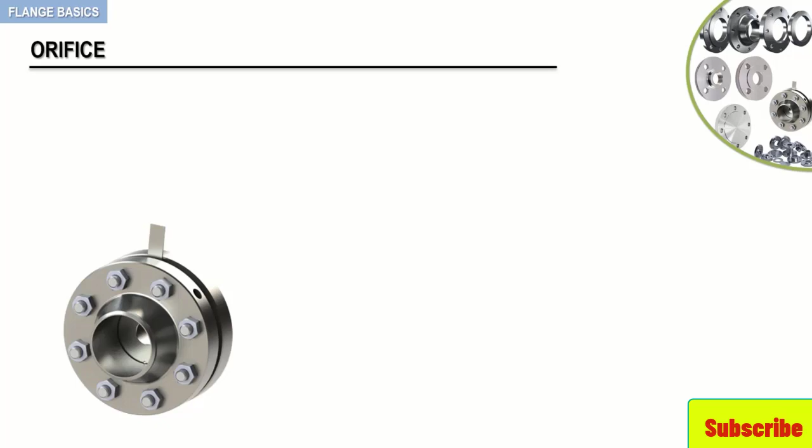In this video, we're going to talk about a particular flange, the orifice flange, so let's have a closer look. Why is it that the orifice flange is particular? Well, because of all the flanges discussed so far, the orifice flange, as in this example, is the only one that actually performs a function. The function of the orifice flange is to measure the flow rate of the fluid through the piping system.

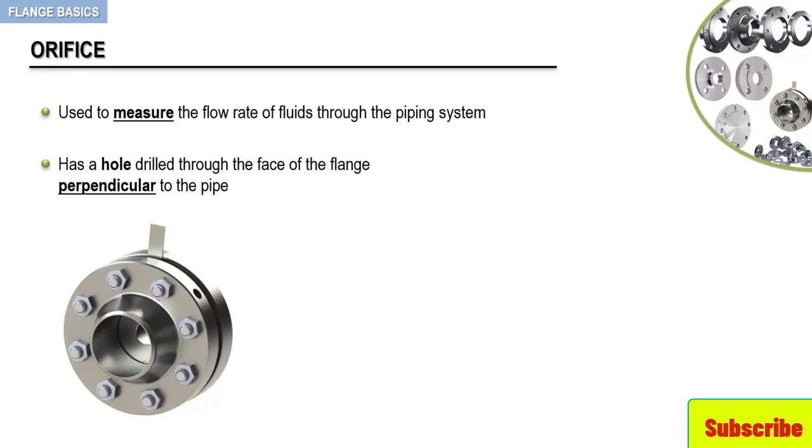Orifice flanges are easy to recognize because they have a hole drilled through the face of the flange, perpendicular to the pipe. To better illustrate this concept, let's have a look at an exploded view of a typical orifice flange. So here you have the flanges and the orifice plate. As you can see here, the plate is drilled through the face.

This orifice creates a pressure drop when the fluid passes through it. The measurement of this pressure drop permits the calculation of the flow rate, since pressure drop and flow are related to each other. The measurement of the pressure drop is done using a differential pressure gauge connected to the orifice flange taps that you can see here - one tap upstream of the orifice and a second one downstream of the orifice.

The next video will provide more details on how these special types of flow meters work.

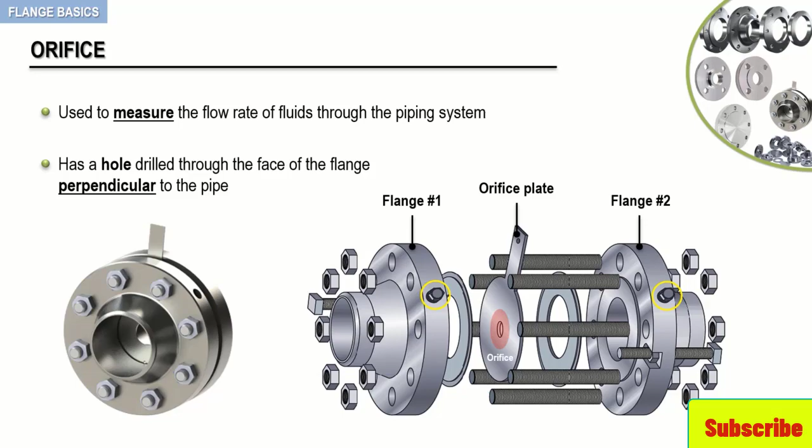Notice now that the orifice flange has an additional set of bolts called jack screws. These screws are used to help separate the flanges so inspection or replacement of the orifice plate can be performed. So, as you can see here, the orifice flange is a single component of the orifice flange union assembly. The orifice flange union is composed of two orifice flanges, one orifice plate, bolts, nuts, jack screws, and two gaskets.

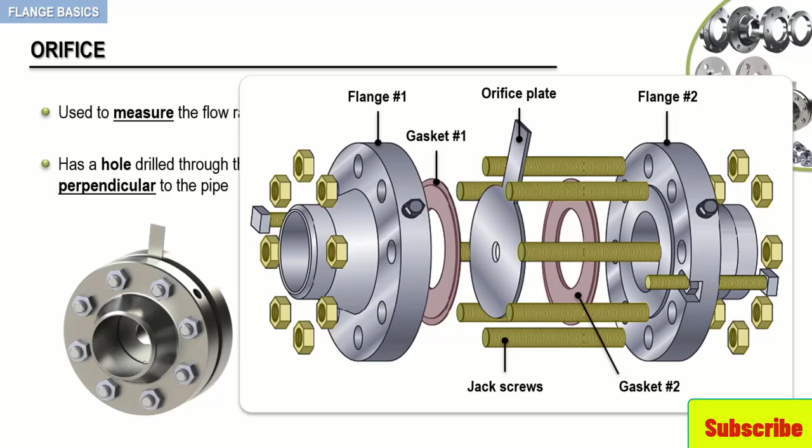As I said, the orifice flange union is used to measure or meter the amount of pressure drop through the orifice plate. The length of pipe within the piping system where orifice flanges are installed and where these measurements are recorded is known as a meter run.

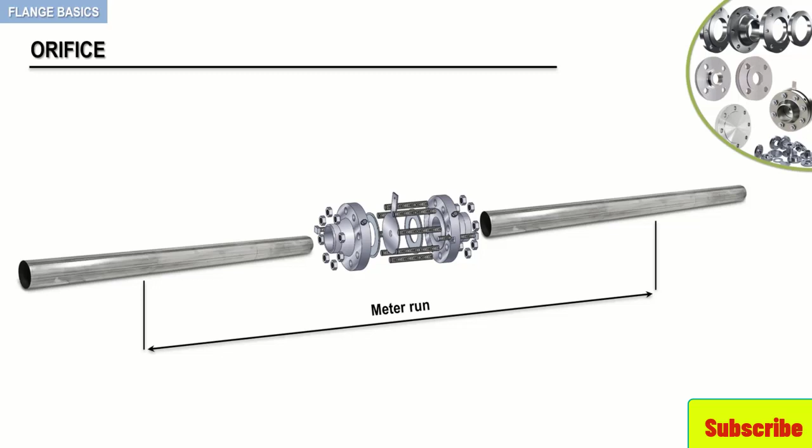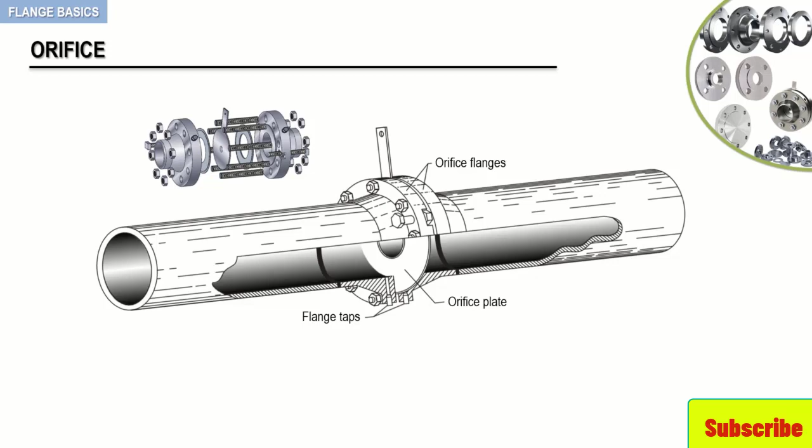The broken out section shown in this next figure shows the internal view of a meter run. The orifice plate that you can see here, which is not typically furnished with the orifice union assembly package, looks similar to a large ring washer with a handle attached to it, as depicted here. When fully assembled, the orifice plate is sandwiched between the orifice flanges.

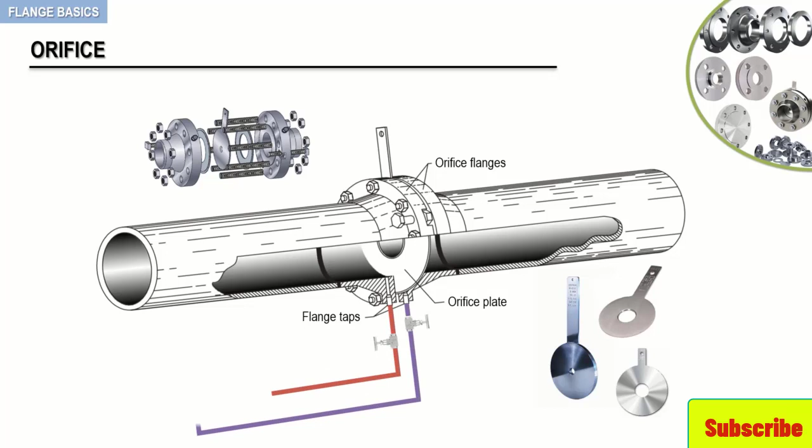Flange taps are inserted into pressure holes that allow for the attachment of field monitoring equipment so that accurate measurements can be recorded.

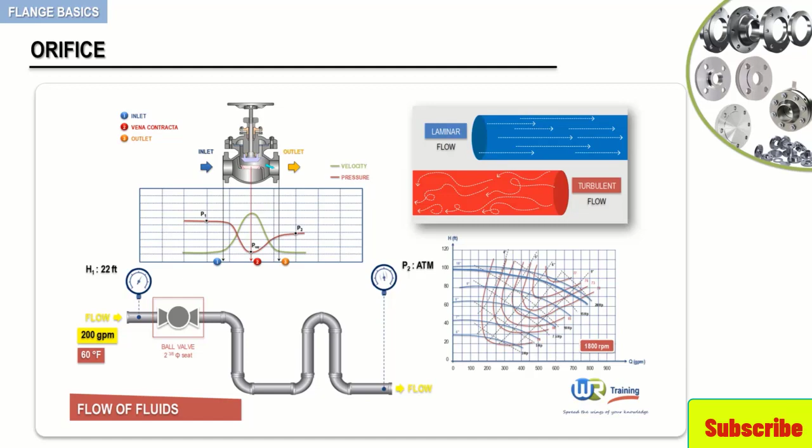Finally, to finish off this video, orifice flanges can be either weld neck, slip-on, or threaded. The weld neck and threaded orifice flanges are manufactured in 300 and larger pound ratings. However, the slip-on orifice flange is only available as a 300 pound rating raised face flange.

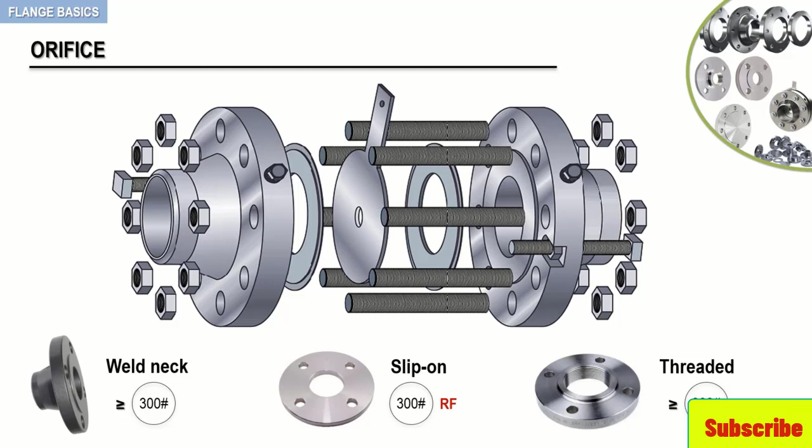The single line and double line drawing symbols for the orifice flange are shown in the following figure. Here, FE means flow element. This indicates that the orifice flange depicted in this example is used to measure the flow rate of the fluid flowing through the pipe.

Finally, notice how the valve taps are represented. Recall, these are inserted into pressure holes that allow for the attachment of field monitoring equipment so that accurate measurements can be recorded.

In both drawings, the orifice plate is represented by a solid black line between the connecting flanges, as highlighted here in yellow. In some drawings, the dimension, size, and pound rating of the orifice will be indicated. If it is not the case, then this information can be found on the orifice plate itself, as depicted here.

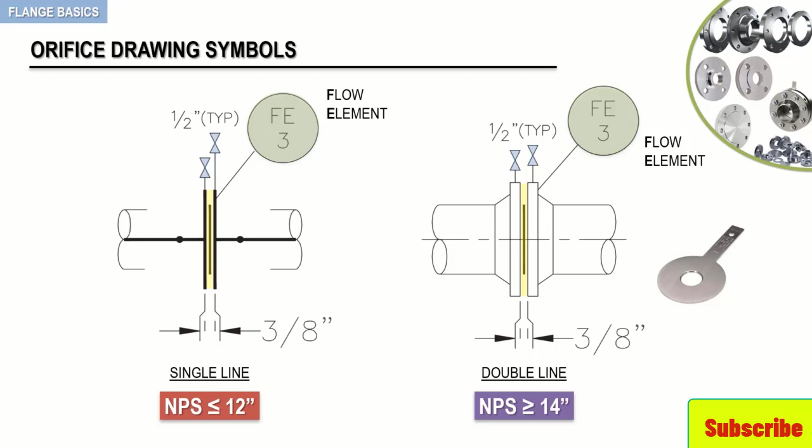In this example, it is a stainless steel 2-inch 300-pound rating orifice plate with a bore diameter of 1.34.